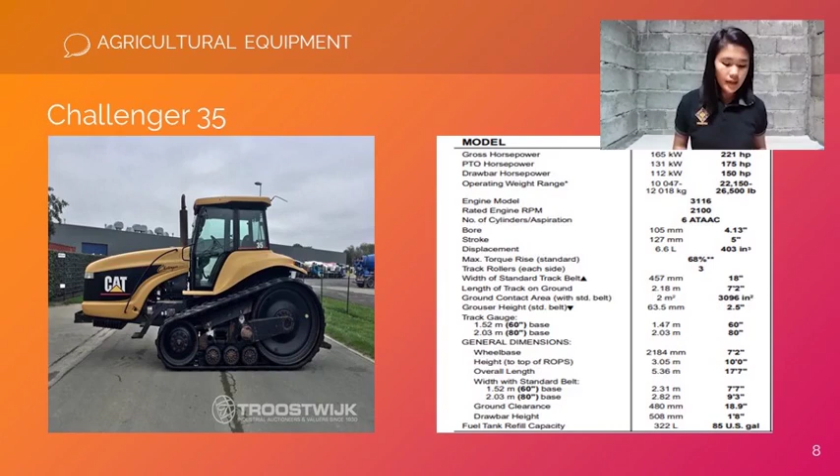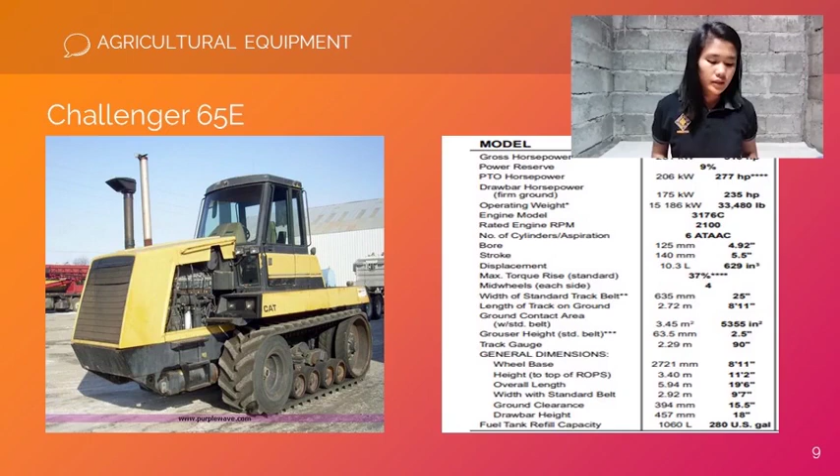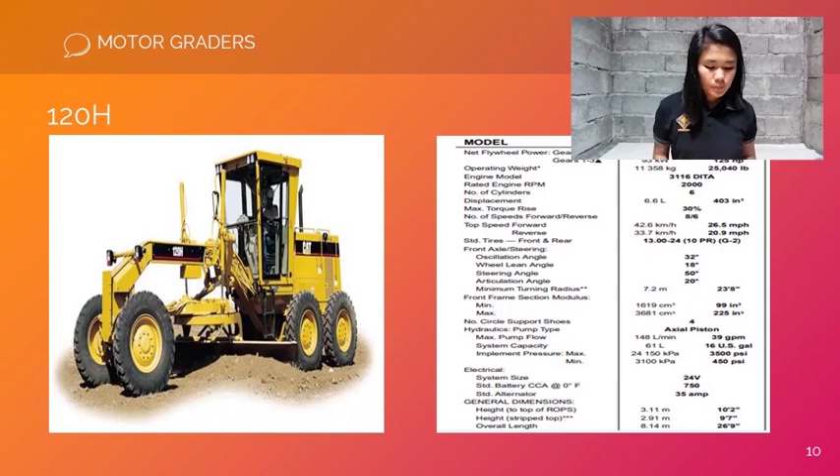Next equipment is the motor graders, and one example is the 120H. It has a net flywheel power in gears 4 to 8 of 104 kilowatts or 140 horsepower, and in gears 1 to 3 is 93 kilowatts or 125 horsepower. It has an operating weight of 11,358 kg or 25,040 pounds. Engine model 3116 DITA, rated engine RPM is 2,000, number of cylinders 6, displacement 6.6 liters or 403 cubic inches.

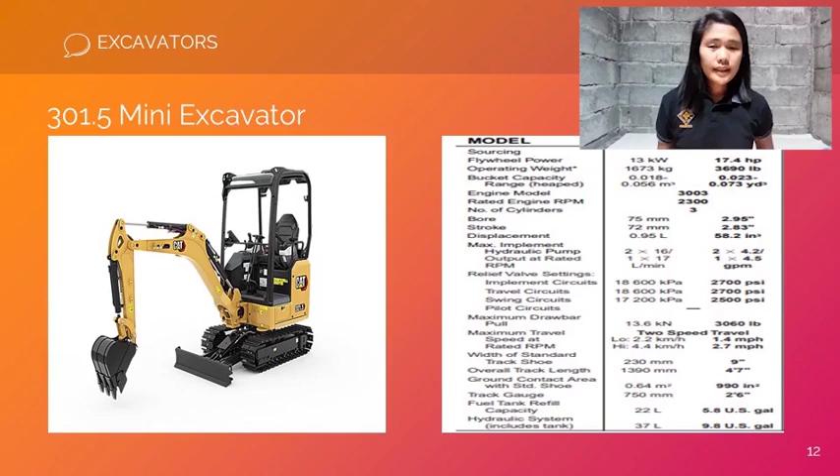The next equipment is the excavators, and one example is the 301.5 mini excavator. It has a sourcing flywheel power of 13 kilowatts or 17.4 horsepower, operating weight of 1,673 kilograms or 3,690 pounds, bucket capacity range or heaped of 0.018 to 0.056 cubic meter or 0.023 to 0.073 cubic yard. Engine model 3003, rated engine RPM 2,300, number of cylinders 3.

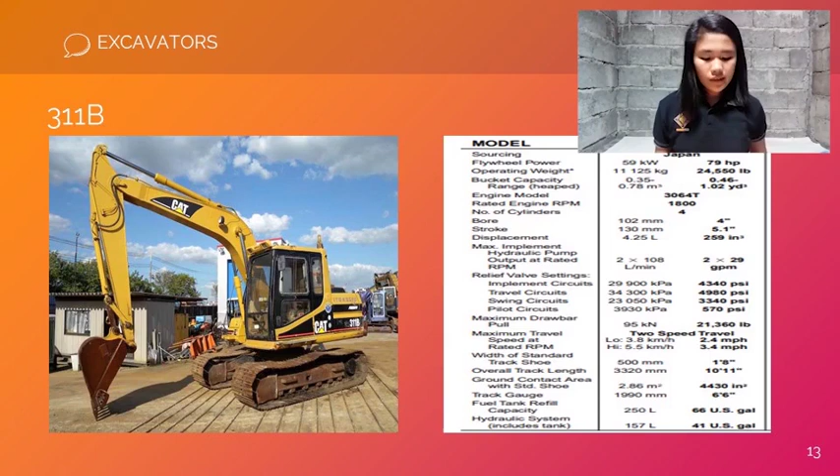The second example of excavators is the 311B. It has a sourcing flywheel power of 59 kilowatts or 79 horsepower, operating weight of 11,125 kilograms or 24,550 pounds. Bucket capacity range 0.35 to 0.78 cubic meter or 0.46 to 1.02 cubic yard. Engine model 3064T, rated engine RPM 1800, and number of cylinders is 4.

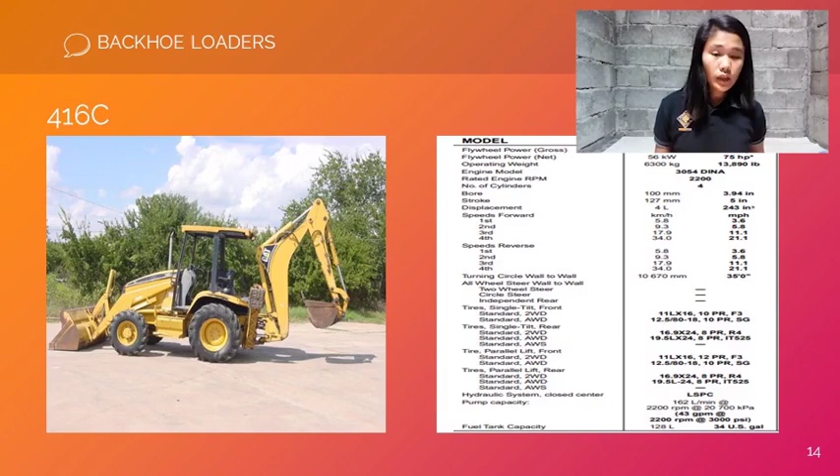Next equipment is the backhoe loaders, and one example is the 416C. It has a flywheel power gross of 59 kilowatts or 78 horsepower, flywheel power net 56 kilowatts or 75 horsepower, operating weight of 6,300 kilograms or 13,890 pounds. Engine model 3054 DINA, rated engine RPM 2,200, and number of cylinders is 4.

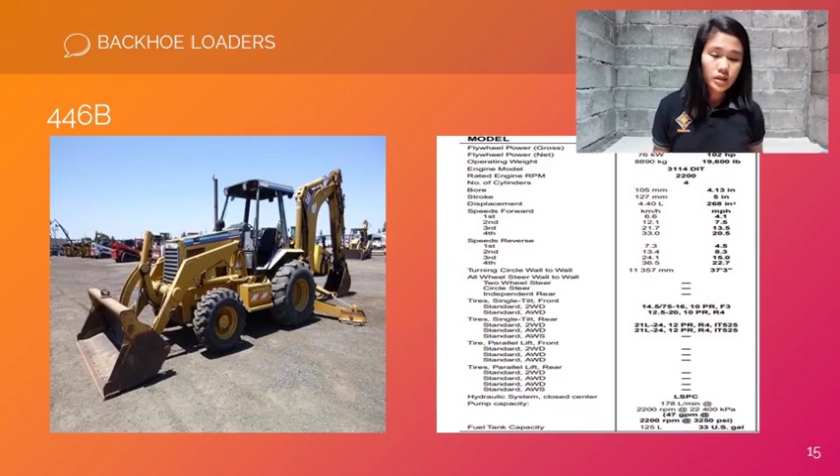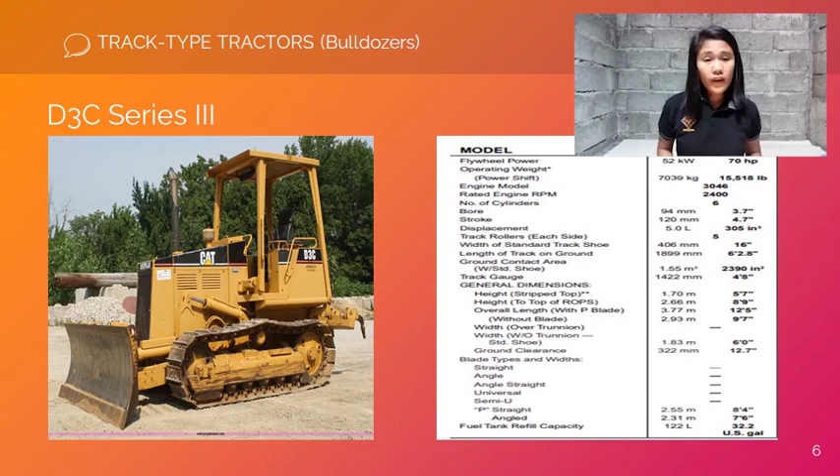One of the examples of track-type tractors or bulldozers is the D3C Series 3. It has a flywheel power of 52 kilowatts or 70 horsepower, operating weight of 7,039 kilograms or 15,518 pounds, engine model 3046, rated engine RPM 2,400, number of cylinders 6, bore 94 millimeters or 3.7 inches, stroke 120 millimeters or 4.7 inches, displacement of 5 liters or 305 cubic inches.

Next is the agricultural equipment, and one of its examples is the Challenger 35.

It has a gross horsepower of 165 kilowatts or 221 horsepower, PTO horsepower 131 kilowatts or 175 horsepower, drawbar horsepower 112 kilowatts or 150 horsepower, operating weight range of 10,047 or 22,150 pounds. Engine model of 3116, rated engine RPM of 2,100, number of cylinders or aspiration 6 ATAAC.

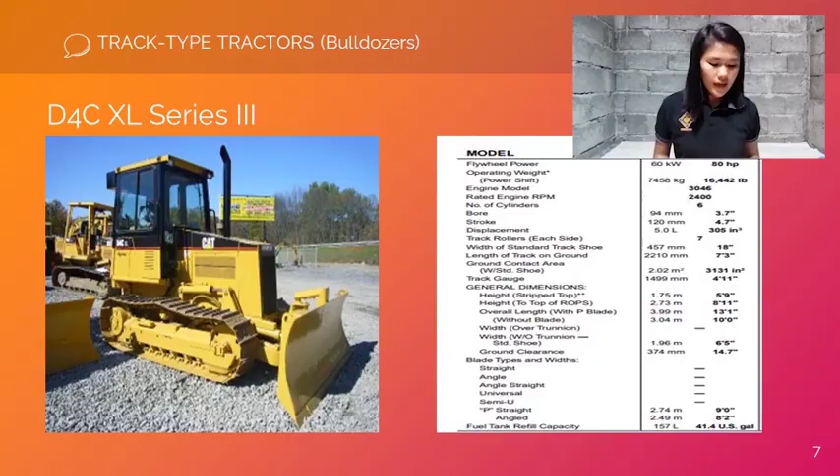And in conclusion, machine performance must ultimately be measured in unit cost of material moved, a measure that includes both production and cost. Factors bearing directly on productivity include such things as weight to horsepower ratio, capacity, type of transmission, speeds, and operating cost. It is very important to know every equipment capacity to ensure the safety of every worker in the construction and to avoid disruptions during the making of the project.

Association of Carriers and Equipment Lessors Incorporated, or ACEL. About the ACEL, it is an organization that assigns rates on equipment. So, here are the partners of ACEL: the CMDF or Construction Manpower Development Foundation, the DM Consunji Technical Training Center, DMCTTC, the Monark Foundation Technical Institute, MFTI, the PCA or the Philippine Constructors Association Incorporated, and the TESDA.

The 24th edition of ACEL Equipment Guidebook has been updated to conform to the volatility of the changing market. Government agencies like the Department of Public Works and Highways, or the DPWH, as well as NIA and DILG, have endorsed the equipment guidebook as basis for the project cost. ACEL has listed equipment which are 20 years old or more, specifically earth-moving equipment. And the rates listed are based on 5-year-old equipment, and such rates are average standard.

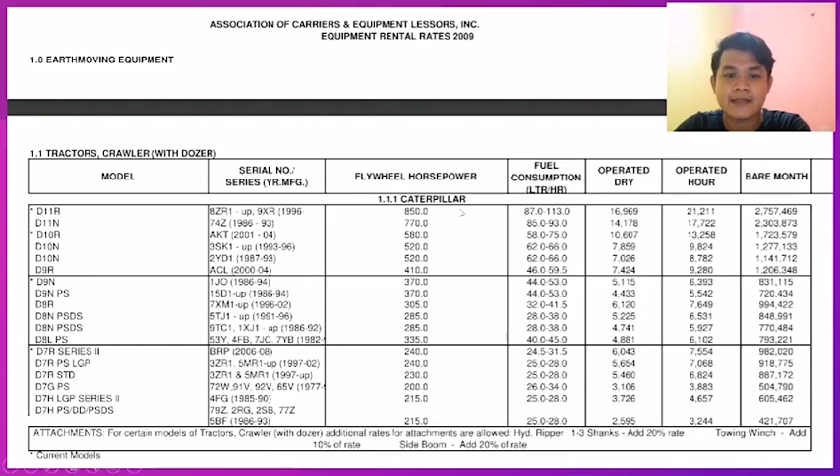So here are some examples of the equipment rental rates of ACEL. So first, we have tractors, crawlers with dozers. And we can see here the model of the equipment, the serial number of the equipment, the horsepower, fuel consumption, the bare month. And then we also have the brands as categories for each equipment and its rates. So for example, here we have Caterpillar.

So for example, for the brand Komatsu on tractors, crawlers, we have the D85ESS-2A and the serial number 3001 up of 1994 with a horsepower of 200 and 16.8 to 25.2 fuel consumption, operated dry of 3,188 and operated hours of 3,985 with the bare month of 518,089. We also have here different kinds of brands on different equipment.

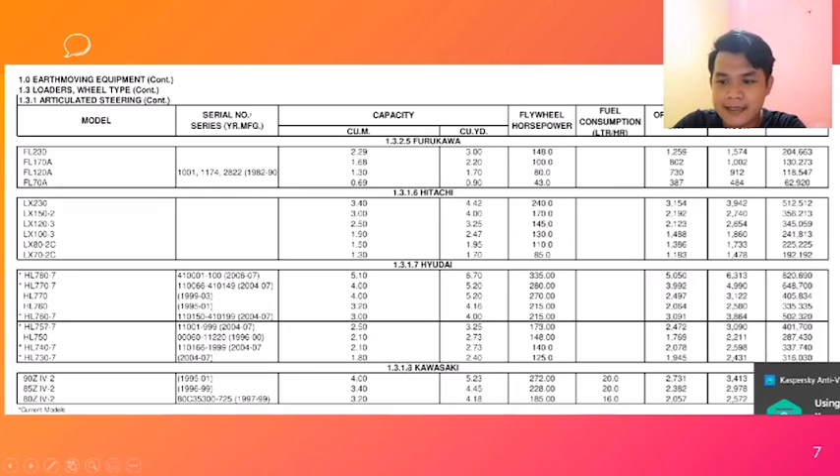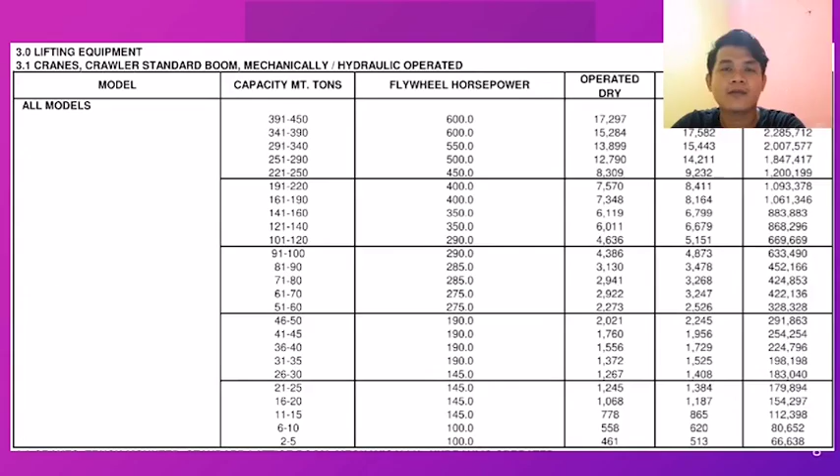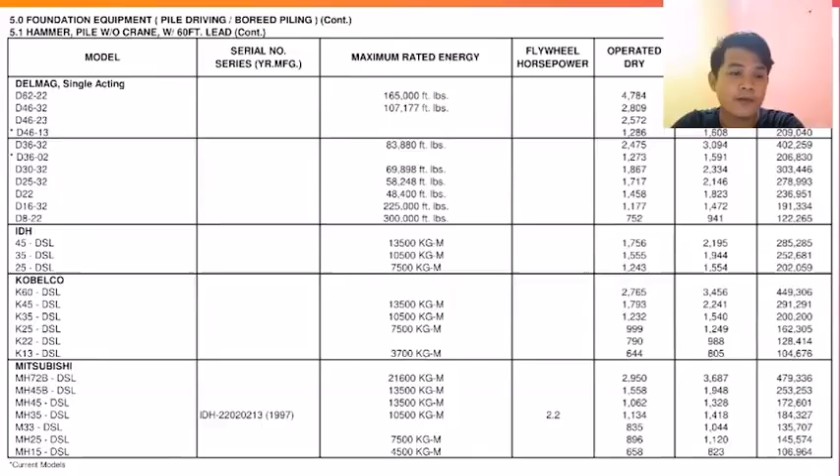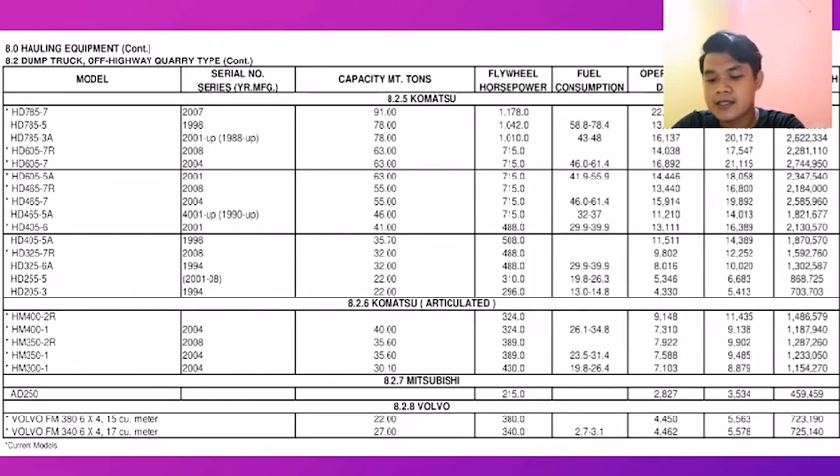So for example, in articulated steering, we have Furukawa here, Hitachi, Hyundai, Kawasaki, and each of them also has different bare month or rental rates. These have all the equipment used in construction as well. So we also have here pile hammer or crane and driver vibratory, dump truck, off-highway quarry type, as well as hauling equipment.

For example, on contractors' equipment, we have here different types of equipment used on construction. For example, excavator, truck, crawler, bulldozer, etc. Then we have our unit, our quantity. Then we can use the unit rates from ACEL or other sources. Then we can calculate the amount and sum it up to come up with the total cost for our equipment.

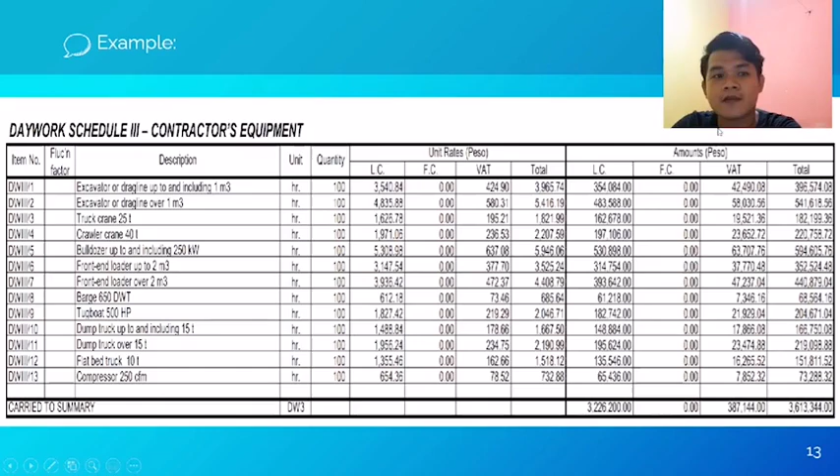ACEL first introduced the practice of equipment leasing and rental, and today it is considered the best possible alternative to owning construction equipment that will necessitate costly maintenance and upkeep. So for more information, you can visit their website, contact them using their phone number and their emails, and also you can visit them at their address, Pasig City, Philippines.

So today, I'm going to discuss the National Irrigation Administration rental rates of equipment and motor vehicles. So first, I am Carl Francis, and we are the 10th group. This presentation talks about the NIA rental rate. So what is NIA? The National Irrigation Administration is a government-owned and controlled corporation primarily responsible for irrigation development and management, created under Republic Act RA 3601.

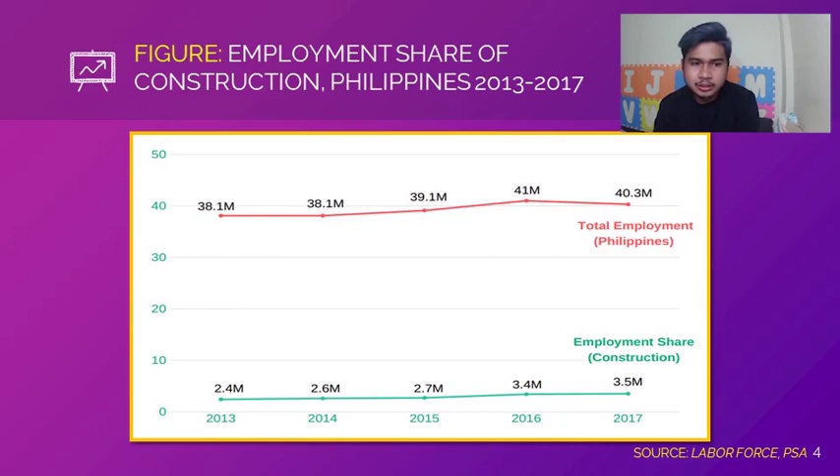So in year 2013 and 2017, this is the employment share. The construction industry accounted for an average of 7.4% of total employment from 2013 to 2017. On an annual basis, its employment share has been increasing from 2.4 million to 3.5 million. So in this figure, you can find the employment share of construction in the Philippines in the year 2013 to 2017.

So the hours of work. The industry works an average of 41.4 hours per week from 2013 to 2017. This is slightly lower than the number of hours worked in the industry sector and construction industry, which averaged 43.7 and 43.4 per week respectively during the same period.

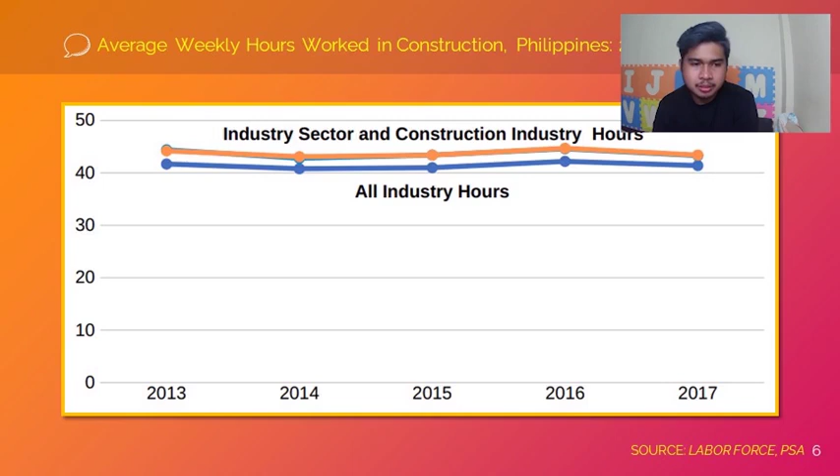In Region 2, 370 pesos. In Region 3, 369 to 420 pesos. In Region 4A, 317 to 400 pesos. In Region 4B, 294 to 320 pesos. In Region 5, 310 pesos. In Region 6, 310 to 395 pesos. In Region 7, 356 pesos to 404 pesos. In Region 8, 325 pesos.

In Region 9, 316 pesos. In Region 10, 343 to 365 pesos. In Region 11, 396 pesos. In Region 12, 336 pesos. In Caraga region, 320 pesos. And in BARMM, 300 to 325 pesos.